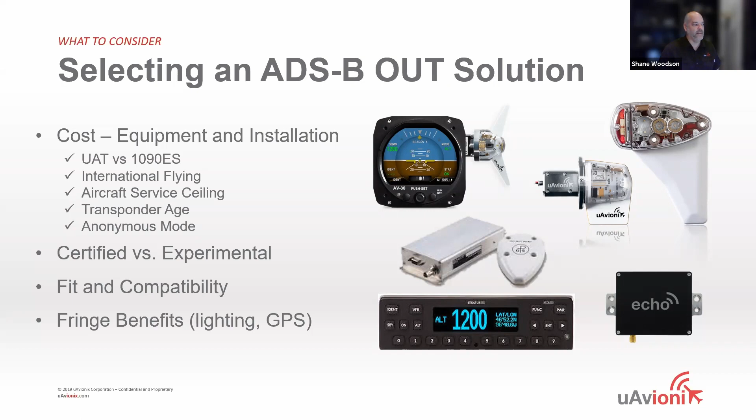Just real quickly going over: Echo UAT is our experimental only. Sky Beacon is the wingtip—I'll be quick on these. Tail Beacon is the tail marker light.

You do have to be careful on some of the tail marker lights—Stinsons and Super Cubs if they have fabric tails. There's an inner cone that protects the wiring from getting into the fabric, and that cone can sometimes interfere when you put a tail beacon in and twist it. So you want to make sure there's no resistance or anything like that.

The new flagship is Tail Beacon X. This is $2,499—that little box on the end of the tail beacon is your Mode S transponder and ADS-B out; it replaces what's in the panel. That's the first of its kind Mode S transponder with a fully integrated altitude baro encoder. It's got the WAAS GPS in it, the antenna, and everything is in there.

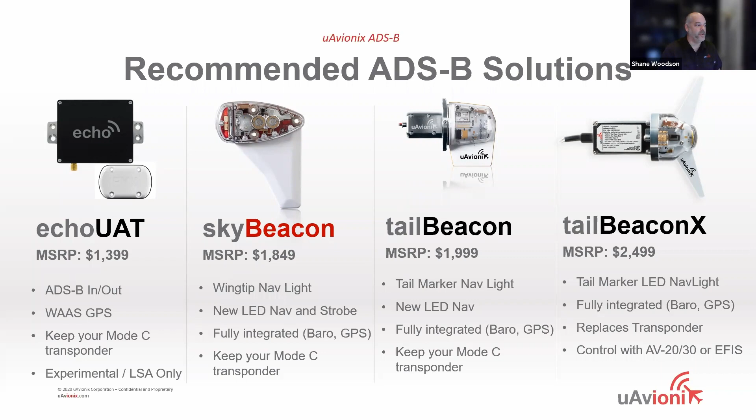It can be controlled with the AV20 for experimental and AV30 for certified. We're also working with Avidyne and several EFIS manufacturers for integration to control that Tail Beacon X. Very low power—it runs on 3 watts, and that's a 250 watt Mode S transponder with ADS-B out plus the nav light and everything else. Pretty incredible what it does with the minimal amount of power it uses.

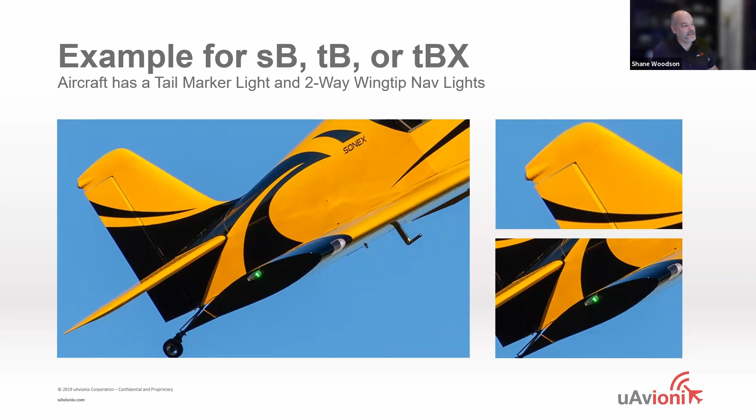Quickly, as you can see on this slide, the wingtip and tail marker lights are prime examples for what your nav light would be for Sky Beacon or Tail Beacon X. I didn't have time to find a Stinson picture, so I apologize—this is a Sonex image that I already had and grabbed.

As for installing certified ADS-B, this wraps it up on the ADS-B side. It does need to be installed by an A&P, and an IA signs off on the 337 form. If you've got a good connection with an IA, they'll typically allow you to do the install, but they have to be the one who signs off and sends the 337 form in. We have a qualified installer program if you don't have anybody—they're more than happy to help.

Moving on to the AV panel displays, this is really where the new product post-2020 is driven, and we are shipping a ton of them right now. It's been very well received.

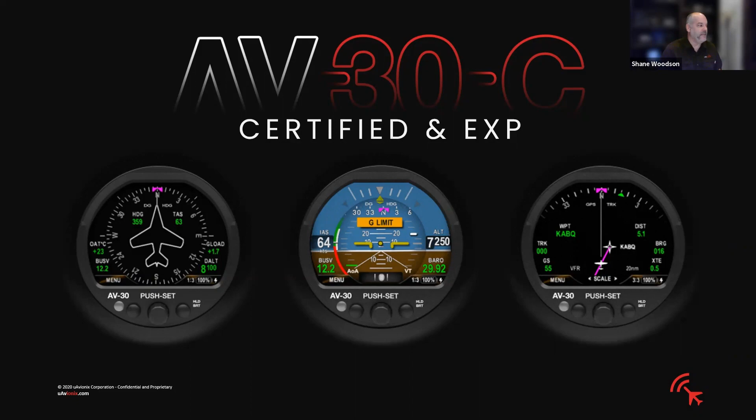The AV30C—this product is available in certified and experimental versions, heavily geared towards the certified. The AV30C is a 3-inch EFIS. The AV20 is essentially a multifunction display.

Your AV30 is currently STC'd and approved for a primary digital attitude indicator and directional gyro, as well as a slip indicator. Every other function you see here is supplemental awareness—meaning the AV30C can go in to replace your attitude indicator, artificial horizon, or your directional gyro.

It cannot replace your airspeed indicator, your altimeter, or if you've got an IFR HSI—it cannot replace those. It is, in fact, a primary replacement for your attitude indicator and directional gyro.

So it fits into the 3-inch slot. There is no cutting or anything to replace any panels. You'll see how thin it is in the next couple slides.

The AV20 is a 12-in-1 display. I'm not going to go into all the marketing stuff and the hype here. It is an approved VFR and IFR digital clock. For $895, this little baby is very bright.

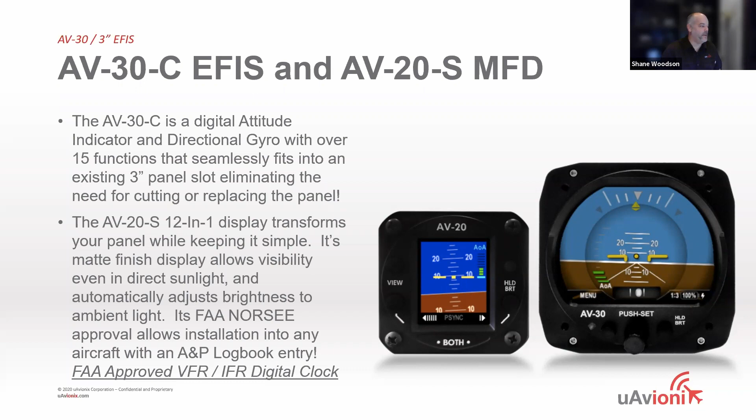It gives you an attitude indicator, an angle of attack, and the clock function alone has timers, Zulu time, count up, count down, a flight timer and an engine timer. So there's a lot of adjustability in there and multiple functions. I'll get into a little bit more after this as well.

So just to touch base real quick on the AV30C key features: attitude indicator, it is a non-slaved DG, not to be confused with a magnetic compass. When you get in this, you do have to set it to your heading, like a whiskey or liquid compass, runway heading. You do have to set it. That's non-slaved. The probeless angle of attack, it has the bus voltage meter, a G meter.

You've got a bank angle, indicated airspeed, pressure altitude, and apologies that every once in a while I see a new joining member. So vertical trend, it's got vertical speed. It also controls the tail beacon X, which we'll show a little bit here later.

You can, with an optional outside air temperature probe, it will give you density altitude, true airspeed, and then a new function that's out there for the experimental is with our AV Link. It actually has a traffic display screen that will be certified. There will be an AV Link STC, and that will pass the traffic information into the AV30.

Small screen, but on AV30 and AV Link, I'll get into a little bit more information here. Pretty exciting product. And then autopilot integration is in the works. TruTrak and AeroCruze is a digital autopilot. That is the first round that will probably be released here shortly.

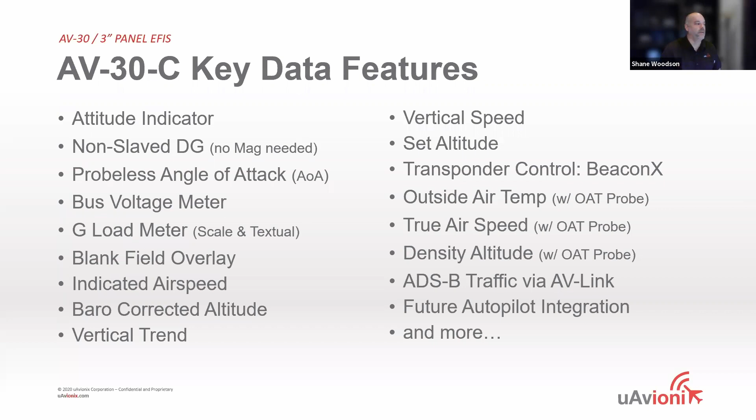Beyond that, we get into some twins and some additional functions.

Again, not to rehash this, but these are your primary replacements that you can replace: your primary DG, your primary attitude indicator, and then you do get a bonus nav data screen if you feed a GPS into it. If you've got a portable or panel GPS, the AV30 actually does end up accepting what's called the NMEA data and the aviation format.

Those are your most common GPS sentences. And so with that, you get your flight plan legs, waypoints, some integration into the panels, and obviously you get a GPS nav track, and you also get your GPS altitude and your GPS ground speed. So a lot of additional information there when you do tie in a GPS into the AV30.

So also, just to toggle between these modes, it's a long press on the center knob. There's only 3 buttons on the AV30. So you have a left button, which is menu, and it toggles you through the different menus. The center button is what you use to set your Kollsman, your baro. You use it to set your DG, to set the DG heading bug.

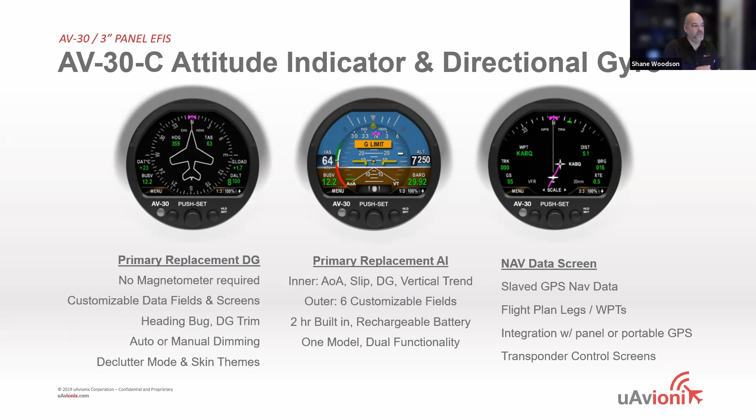And one AV30 is capable of running all 3 functions as you toggle them. It's not like it's only going to run one like a competitor G5 or 275 where you have to buy it specific to the instrument. All those functions are running at the same time. You're just using the center button to toggle between modes, if you will.

So in summary, the AV30C, you get a lot more features, it's less money, and there's hardly any install. The minimum installation on AV30 is power, ground, plumbed into the pitot-static. And on the back, you'll see here in the next slide, it's just the quick connect press-in features for the air data.

You do get to keep the classic look. Many on this call with Stinsons, we've got these in a lot of vintage aircraft. You're only going to see the round portion. You're not going to see, obviously, the screw holes and portions.

So when that unit's on, it looks like a photorealistic instrument. And then when you turn it off and it's sitting on display, if you've got a show plane or something like that, when you turn it off, that screen's black. Nobody really has, none the better to tell that it doesn't look out of place with a vintage aircraft.

We even have some skins on the AV30 that you can go from a high visibility EFIS. You can go to this, what you see on the screen is the legacy, it's kind of the photorealism. And then there's a vintage one, which kind of grayscales it. It's not really a sepia tone, but it grayscales it, takes it down, and fits those pre-60 aircraft, making it look a little bit more in tune with the rest of the panel.

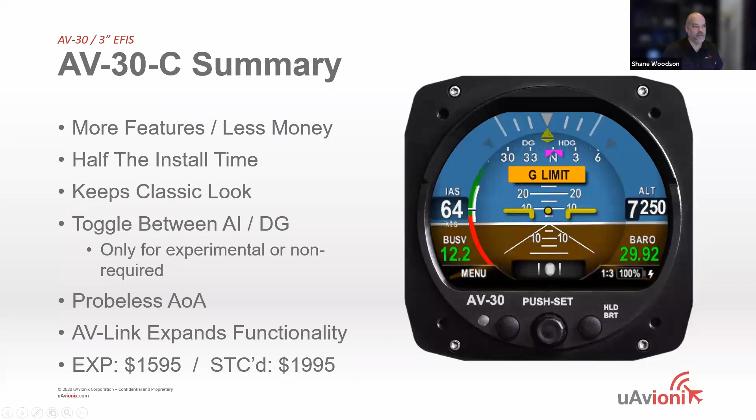It's user replaceable. This is a battery. The continued airworthiness is not like some of the competitors where every 2 years you have to replace a $250, $270 battery. The AV30, every 2 years you do a 2-hour battery test. This battery recharges as you're flying. And when you do that self-test, if it holds 2 hours, keep on flying. Our battery, we've not sold any batteries yet, but the target price on the battery is between $50 and $75. So you can get the ideal right there, very affordable.

Again, we're the company that's trying to look out for the pilot and the aircraft owner. So, excuse me, just to touch on a couple of these things.

GPS integration: there's no required magnetometer or GPS to install. Again, it's non-slaved. I will get into a little bit on the magnetometer and GPS here in a second. There are no wires to run between units or anything like that. If you put in an attitude indicator and a directional gyro, you can remove your vacuum pump.

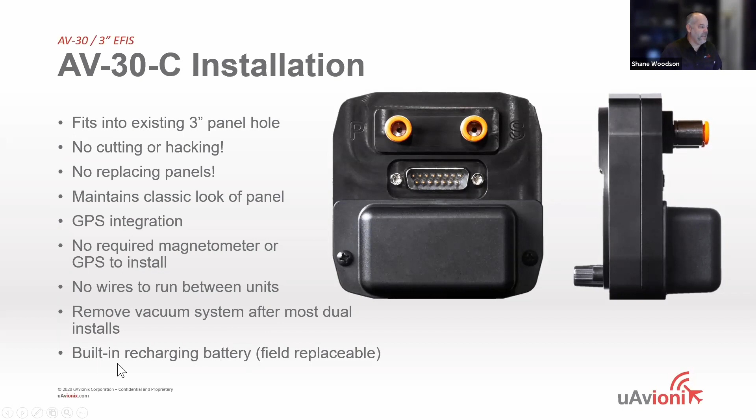That is the most affordable way to do this. You put one AV30 in for the AI, one in for the DG. The mechanic does the 337 form to remove the vacuum pump. And if you have that dry vane vacuum pump, you don't really have to ever worry about that failing again. Again, field replaceable battery built into it.

So it does not give you vertical guidance. It's going to give you the horizontal, but it will not give you glide slope, ILS, or vertical guidance. It is essentially your horizontal guidance for a GPS HSI.

Again, you can slave it to the GPS when you do this. All of the data fields that you see in here are customizable. If you wanted the distance on the left and the waypoint on the right, you can change those around however you want. Everything in the AV30 is really customizable. You can remove those data fields if you want it clean and decluttered, or you can add them back in and pick and choose where you want them.

We even have different fonts. If you like a digital font or you like the traditional kind of Arial font like this, most people keep it the way this one is right here.

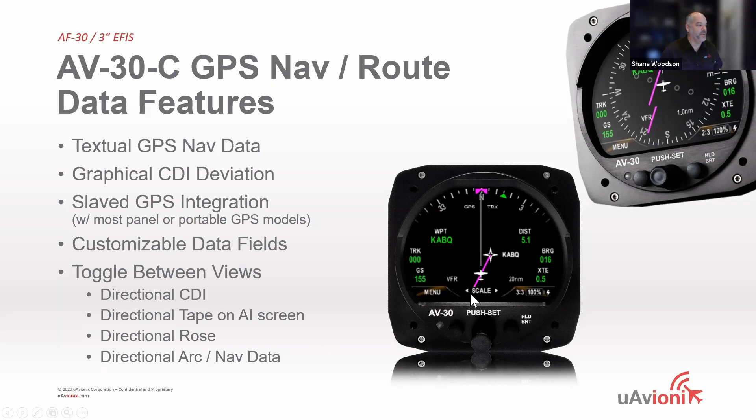So there are alerting features. If you plumb in the audio to an intercom or an audio panel, you'll get the angle of attack alerting, G-limit alerting, excessive roll. All of those are adjustable when they go on. You do get the visible alert on the screen, which you see the G-limit right on the center of the screen, and you get the audible alerts in your intercom or audio.

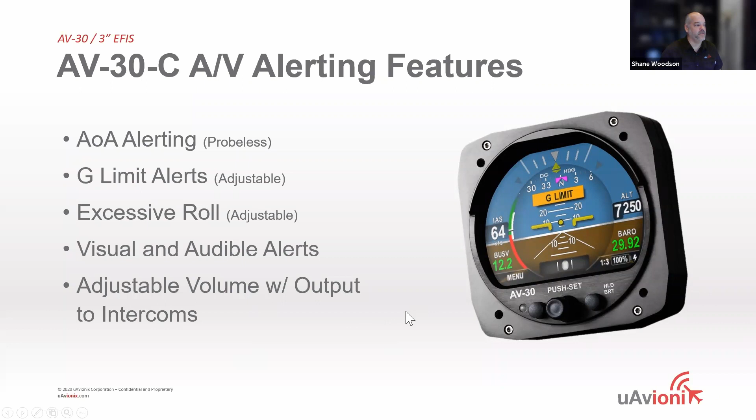The AV30 does not have a speaker, so it won't have its own audible output, but the volume is adjustable. There is an internal adjustability so that you can make it mesh up with your intercoms as well.

You can set the registration and ID information in the AV30. It's got your squawk, you can change the mode. It has a shortcut you can see, the ident there gives the GPS levels, so you know that you're receiving good GPS, and then you have a status here as well.

Very simple and easy to use. Basically, when you're in this mode, say you're in attitude indicator or DG mode, you just right press this right button here, the view button, and that gets you to the AV30 transponder control screen. Then you press the center button, the squawk pops up, and you rotate right or left to change the digit and value.

Once you're done, you hit the left button and you're done, squawk's over. So it's single knob entry for a squawk, but it's common to a lot of units out there that are this same form factor.

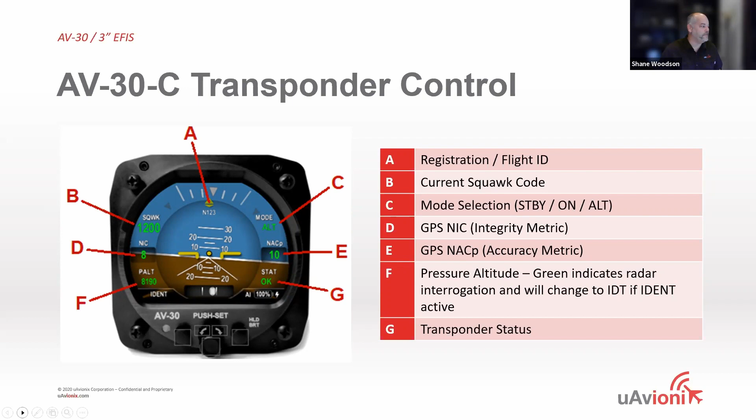Again, the AV30C talks to the AV Link. It's kind of paired for power integration, and I want to talk a little bit about this because the AV Link, it is Wi-Fi.

It auto connects to any of the GDL90 ADSB receivers. So if you've got a Stratus 3, a Sentry, Sentry Mini, a FlightBox, the Dynon DRX, even some of the panel models out there, the Avidynes, the standard Wi-Fi ADSB, AV-Link will automatically connect and show the display of the traffic on the screen.

What's coming, and very exciting, is many of the EFBs like ForeFlight, iFly GPS, and FlyQ, we're starting to integrate where our AHRS data, our pitot static airspeed and pressure altitude data, all of that information in the AV30, would be able to be passed out through AV-Link into the iPad. So it really becomes an extension of your panel.

A lot of people say, well that's cool, but what does that really mean? What a lot of people don't understand is when you're looking at traffic on your iPad, you're looking at GPS traffic for you, and all the other traffic out there is pressure altitude. So there's a multi-hundred-foot discrepancy built into their traffic reporting. If we get our pressure altitude over to the iPad, whatever app you're using, now that relative traffic altitude is using pressure altitude versus pressure altitude, and it's always going to be much more accurate.

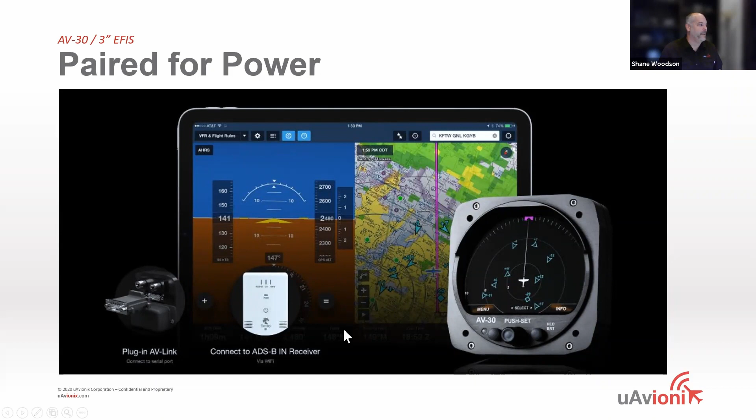So again, I think I've covered that. And here's AV-Link, so you can see a little bit more representation of it. It plugs right into the back. For instance, the DB15 plug would unplug from the AV30, this gets inserted into the AV-Link or into the AV30, and then the DB15 plug plugs back into it. So there's no wiring, it's literally unplug, plug, and play.

Right now, the AV-Link is $299 for experimental, and the certified version is probably going to be in the $349 range, is what we're targeting for. But again, it will get additional functions and features.

And as you can see, there's a little traffic display down there, that's a scalable traffic screen. So as you rotate the dial, you can zoom in and zoom out. If you press the center button, you can rotate and select the traffic and get more information on that traffic.

For a small 3-inch display, it's pretty powerful. Again, it shows the color displays. It's hard to see on this, but traffic that's far away shows as the aqua color.

As it gets closer to an alert status, it turns yellow, and it will go red as well. So you do get the alerting colorations on the traffic targets.

Here you can see, in selecting one of those targets, you actually get distance, altitude, speed, what class aircraft they are, and their call sign. Pretty cool, it highlights it on the screen as well, so you know which one you're looking at.

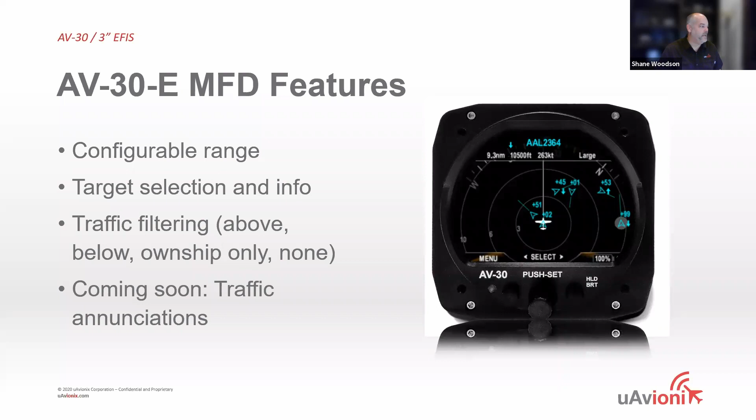Next we'll move on to the AV20, and I'll get some questions on this later. The AV20 is a 12-in-1 multifunction display. It is an FAA approved VFR and IFR clock replacement, and it's NORSEE approved for about 12 other functions, from transponder control to attitude indicator.

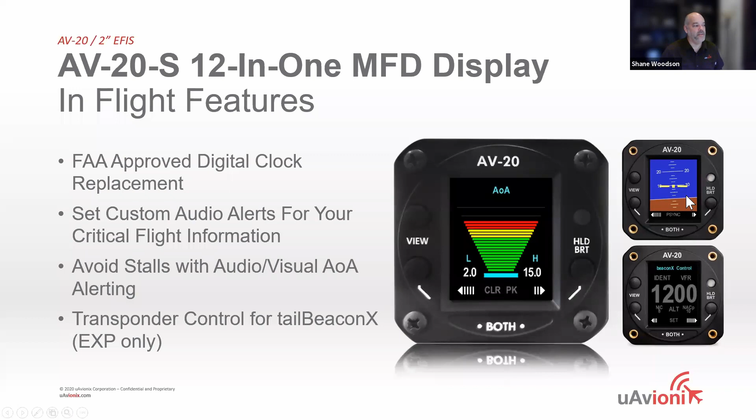It's got an angle of attack indicator, a G meter, a slip skid indicator, clocks, timers, bus voltage, an engine run timer, and a flight timer.

You have to have the pitot-static connected for the flight timer, because it triggers at 35 knots. And density altitude and true airspeed require the OAT probe to be connected.

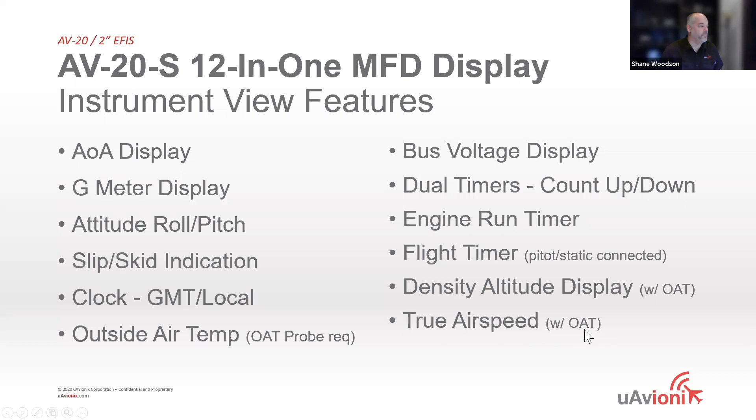Same thing here with the AV20, very small, less than 2 inches thick. This is the quick connect pitot-static, and it's only a DB9, so very, very simple installation.

Most people wire power, ground, and pitot-static, and it's got a built-in battery. It's a 30-minute battery, and it's replaceable. These screws come off and the battery is inside, so it's just a plug and play battery replacement.

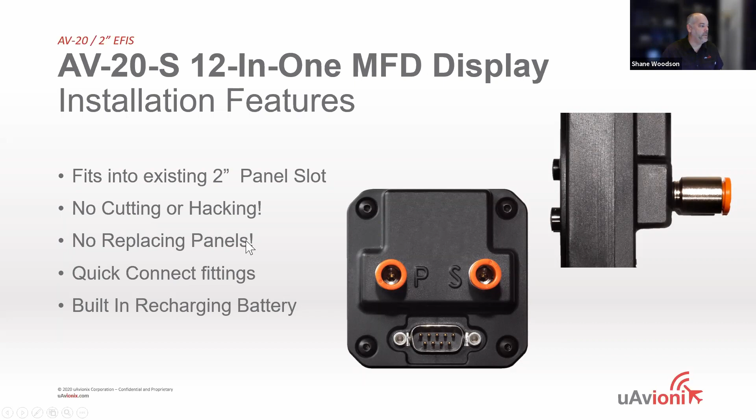Not to rehash this, but it's a simple A&P logbook entry. It doesn't have to have a 337 or an IA sign off. An A&P can install this, sign it off on the logbook, and you're done. I'll say 2 to 4 hours, very generous on time. I put 2 AV30s and 1 AV20 in, and it took me 2.5 hours to do all 3. I did just pitot-static, power, ground on all of them, but it's a very simple and easy install.

Both the AV30 and AV20 are extremely bright in the cockpit, but I've been around the industry a long time, and one frustrating thing is brightness when flying at night. Other instruments are still very bright and almost blind you with bright spots. These instruments get so dim you can barely see them in daylight, they look like they're off, but inside the cockpit at night they are perfect. You can see everything exactly how you want.

It's also very slow reacting to light, so if you hit it with a flashlight, it's not going to burst up real bright and go back down. It takes a good minute or so to make the full swath of brightness. It's one of the best I've seen, and that's one of the reasons why when we looked at this company and product to buy, I was one of the first ones to fly it, and it was like, this is a winner.

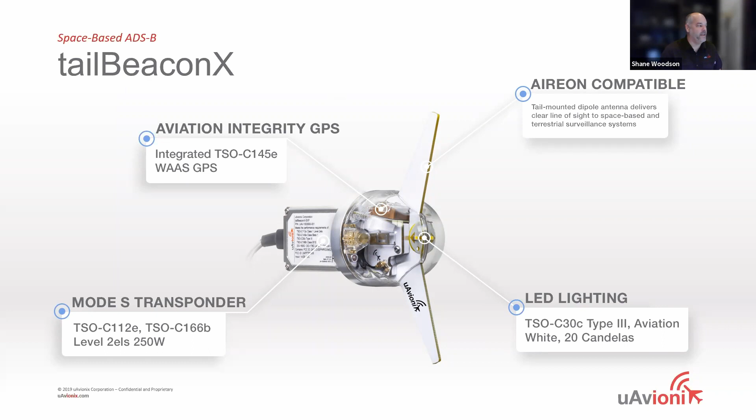And then the LED nav lighting, again, one of the cores of our product. Just to give you an idea, most non-diversity transponders are in the $2,700 to $5,500 range, and that's kind of your Appareo ESG, the Stratus ESG, up to, call it, the 345 and the NGT 9000.

Now, when you go into the diversity, where a diversity system has upper and lower antennas and alternates, that right there, the base level basically starts at about $6,500 plus the GPS, and then pretty extensive install, all the way up to about $8,000 plus GPS and install.

The Tail Beacon X, minimal install and $2,499. So if diversity happens here in the United States, Tail Beacon X is by far the long shot winner for affordability and performance. So just to give you a little bit of an overview here.

If you had an AV30 in the plane, you have 2 wires that run to the Tail Beacon X in the back, uses the existing power ground. And right there on the tail, that's all you have, 2 units, no antennas, no GPS modules, or all the additional wiring and stuff like that.

Down on the bottom, you can see the traditional diversity style antenna, where you have an upper and lower and a GPS antenna and a transponder. What's not on there is you also have a blind encoder that's built into the plane, installed into the plane as well. With Tailbeacon X, you have no blind altitude encoder. It's built into the AV30 and the Tailbeacon X.

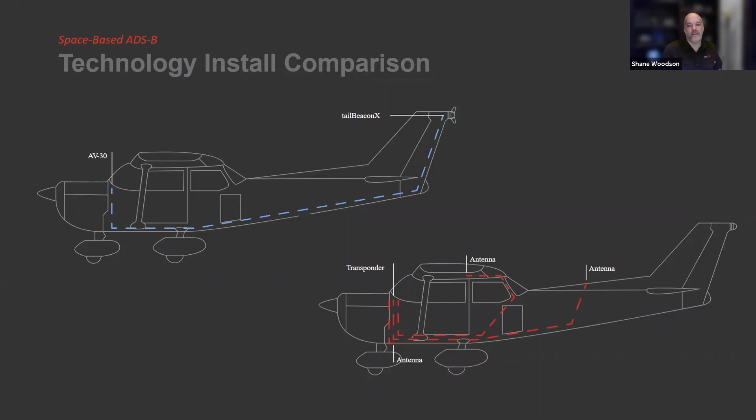So again, not to rehash this on the cost, but very low cost, from $2,499 to about $8,000. Time-wise, you're talking a minimum hour and a couple hours install. They will have to run the twisted shielded pair from the panel to the tail, and generally that's about a 4 to 5 hour minimal that most shops are going to charge. That's based on a $100 an hour rate.

We've heard diversity transponder labor running into the $8,000 mark. So you can back that over to the $7,000 price tag. It's not uncommon to get $12,000 to $14,000 for an installed diversity system. So between you and me on this call, let's hope and pray that does not happen here in the United States.

Not for the pilot side, but I think hopefully with ADS-B and the equipment we have now, we'll be here for a while.

So again, minimal downtime. Here we've got a couple bundle and save opportunities with Tailbeacon X. If you buy an AV30 with it, you actually get a $300 break on the AV30, makes it $1,695.

Experimental is not really relative here for the company, but we do have a 2-inch AV20 unit that is coming out soon. I actually just was in a meeting today. They've got the prototypes ready to go. They're doing the final testing, so hopefully we'll see that launched here before long.